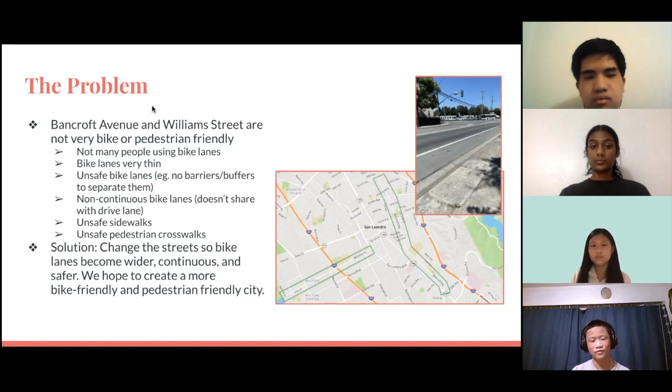We hope to create a more bike and pedestrian friendly city. The goals of our project are to redesign the bike lanes on Williams Street and Bancroft Avenue, to inform residents in San Leandro about the project, to get support from residents and businesses on Williams Street and Bancroft Avenue, and to encourage more people to bike in San Leandro.

The repavement opportunity of Bancroft Avenue from Sybil to 136th Avenue provides a unique opportunity to pilot street changes and new designs. There are city plans to repave Bancroft Avenue from Sybil to 136th.

We, the interns of the City Engineering and Transportation Department, have created possible redesign ideas for the section of Bancroft Avenue, and we would like to hear your feedback.

The Sybil to 136th Avenue section of Bancroft Avenue features many residential homes and bus stops, as well as San Leandro High. The redesign will promote less frequently used modes of transportation, like biking to school, by making routes to school safer.

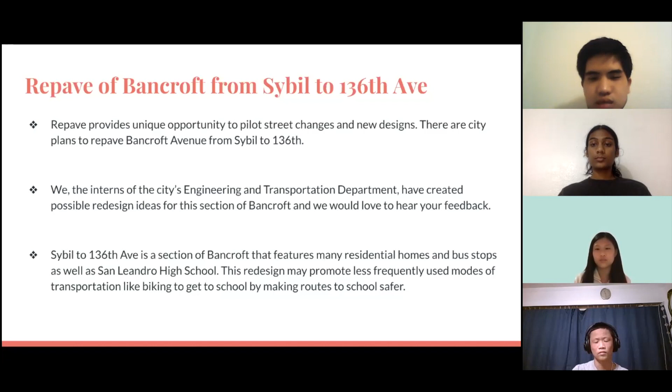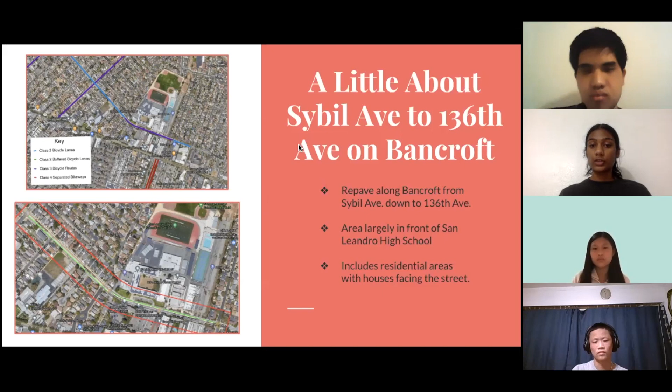A little bit about 136th Avenue to Sybil Avenue on Bancroft: this section is where San Leandro High School is located, and it also has a lot of residential homes along the street.

What we've heard in this section regarding safety concerns is speeding of cars on the street, unsafe ways of passing cars through the left turn lane, unprotected bike lanes, unsafe crossing conditions, limited visibility on the street to turn onto the street from surrounding neighborhood side streets, and very bad traffic flow during drop-off and pickup times at the high school.

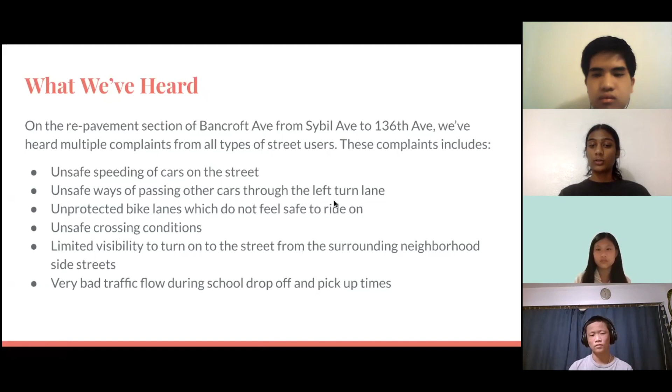The basic concept design from the south lane side will feature a two-way bike lane protected with roadside parking and a small buffer emphasizing the bike lane. The barrier will protect the cyclist from the opening of car doors. The turn lane will also remain, with roadside parking on either side of the street. Speed humps will be added on the lanes to promote safer driving speed.

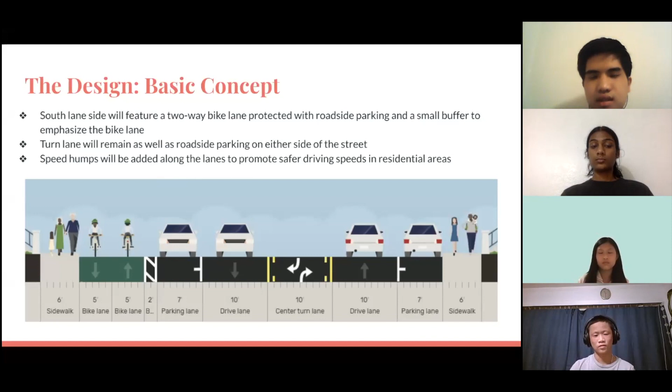The street in front of San Leandro High School will feature a two-way bike lane that runs along the side of the school for better access. The roadside parking will be conserved on the opposite side of the street. A drop-off and pickup loop will be established within the school parking lot to lower traffic on the streets.

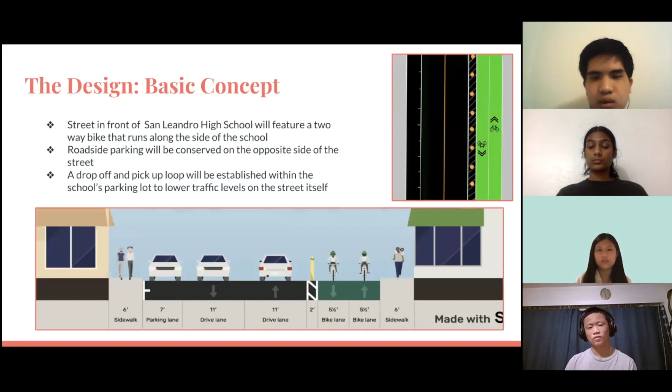Now let's take a closer look at the intersections. The Sybil intersection, on the top left, is the beginning section of the repave, with a transition from a one-way bike lane on both sides of the street to a two-way cycle track on the south side of the street.

The image below shows how the two minor intersections on the corridor being repaved look. The image to the right shows the transition from the bike lanes on the south side of the street to the north side as they approach San Leandro High School.

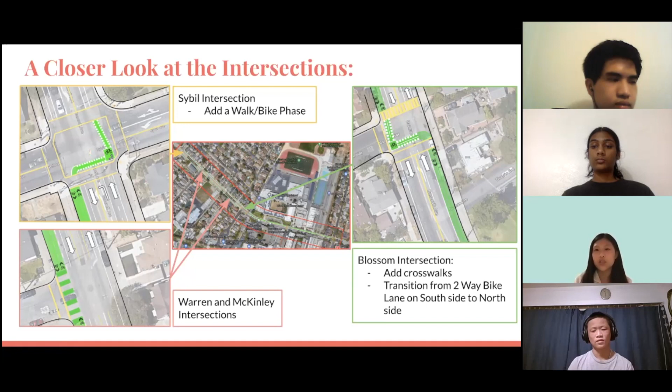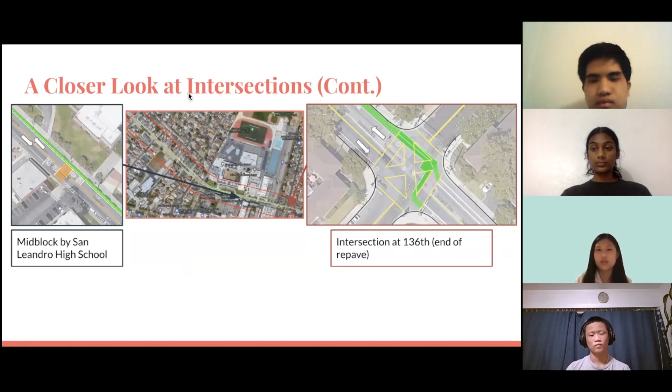The picture on the left shows a mid-block by San Leandro High School, and the picture on the right shows the end of the repavement, where the two-way cycle track on the north side will merge back into two one-way cycle tracks on both sides of the street.

There are four bus stops along the pavement from Sybil to 136th. The first one is near Sybil, just after the Sybil intersection, and we designed a shared cycle track stop where the stage area is a raised platform, so passengers can walk over there to easily board the bus.

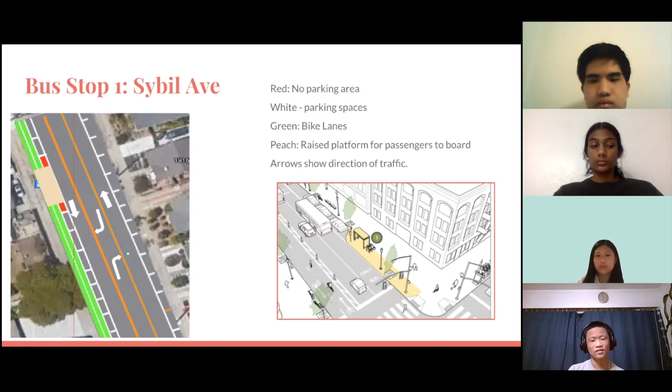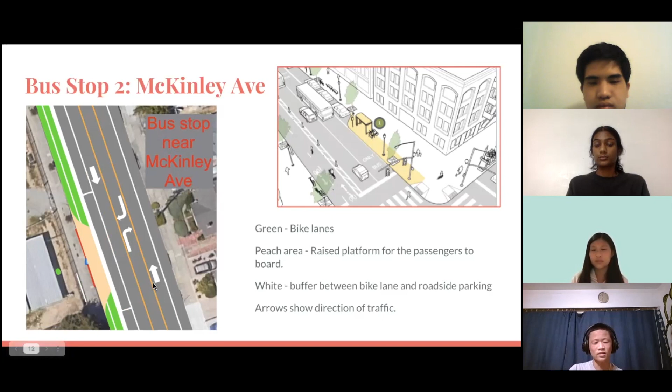The second bus stop is near McKinley Avenue. Again, the beige area is the raised platform, and the red signifies a no parking lane. The third bus stop is on the San Leandro High School grounds.